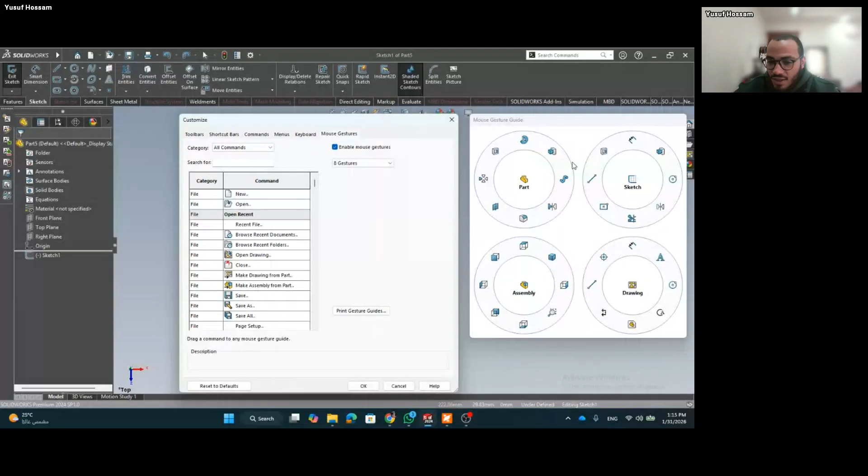You have to use the mouse gestures. You can go to options, customize mouse gestures, and put the mouse gesture that you want. These are the ones I have chosen, and it shortens a lot the time when I solve a question.

So I'll use mouse gesture to make the circle. And I can also put the dimension right now, so I don't have to wait until the circle is done and use smart dimension separately. I can put the dimension right now, 35.

To activate this, go to options, sketch, and enable on-screen numeric input, and create dimension only when value is entered. Check each of these two. So 35, 20.

15, and 50. 15 and 50. I will fix one to the origin, and the other ones I will dimension them. 30 and 60.

30, using smart dimension from the mouse gesture, and 60. The bottom one is 60, and these two centers are vertical. So this is 60, and these two are vertical. The last circle, 30 and 100.

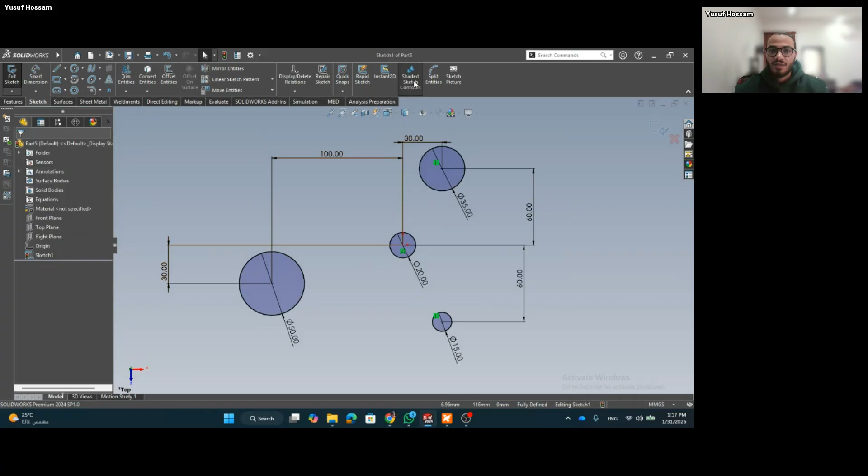Okay, so now the circles are good, the dimensions are good. Now we have to make the belt and chain.

So we can activate it from here, belt and chain. And the arrangement actually is important, so I have to choose the circles based on this arrangement, the belt, the direction of the belt. So an arrangement like this... oh sorry, there is a problem here.

Before we get into the belt and chain, we have to make each of these circles a block. This is actually an error we have, because belt and chain cannot identify regular sketch entities. We have to convert it first into a sketch block. So this alone should be a sketch block, and this alone should be a sketch block, and so on.

So we cannot see it here, but actually this circle is spinning. This is a property in sketch blocks, the shape is not fixed, so it can rotate about this point.

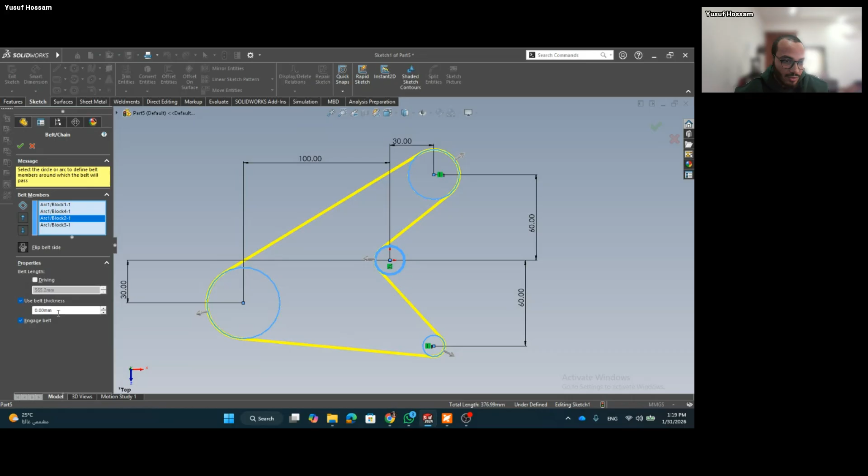Very good. And I can engage belt.

So this is the first question. The belt thickness is 15, and he wants the belt length. The belt length is actually here, and also if I edit the belt, it's actually mentioned there. So this is the answer of the first question, 640.24 millimeters. Okay, so now let's get to the second question.

Oh, there was actually some modification to this exam.

Nearly in all of the questions in all of the exams of SolidWorks, we use something called equations. So we make the first part, or the first question, and it's often an MCQ question, multiple choice question. So you can get to know if you are right or wrong based on if your answer is in the choices or not.

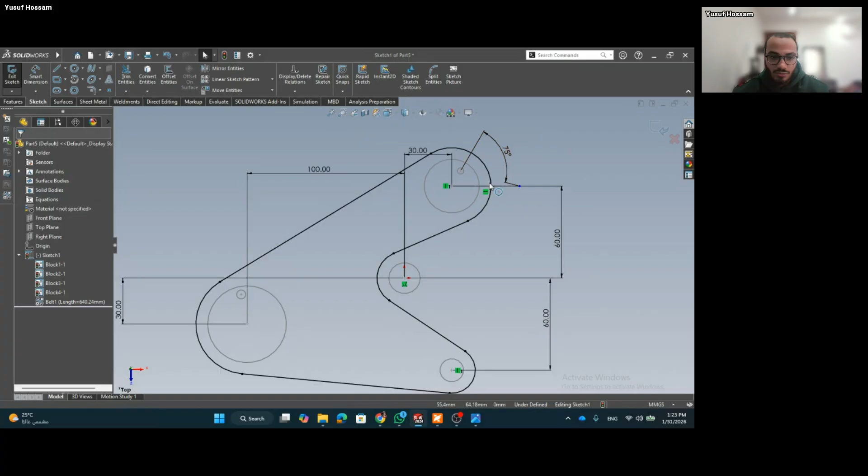Okay, so what I wanted to do is actually making this with an angle, like, it doesn't really matter, 75. I want to just explain you something, and if this is 75, this doesn't work, so I have to do it this way. 40. If this is 40, then this circle also has an angle.

And it's driven, yeah. So if I make this 60, then the angle here changes. 110, and also this angle changes. So this is actually the idea behind the question that might be the second and third questions. So the belt and chain could be 3 questions, and the second and third questions could just be edit the equation or edit this dimension, and so on.

So this is the belt/chain question. Anyone has a question?

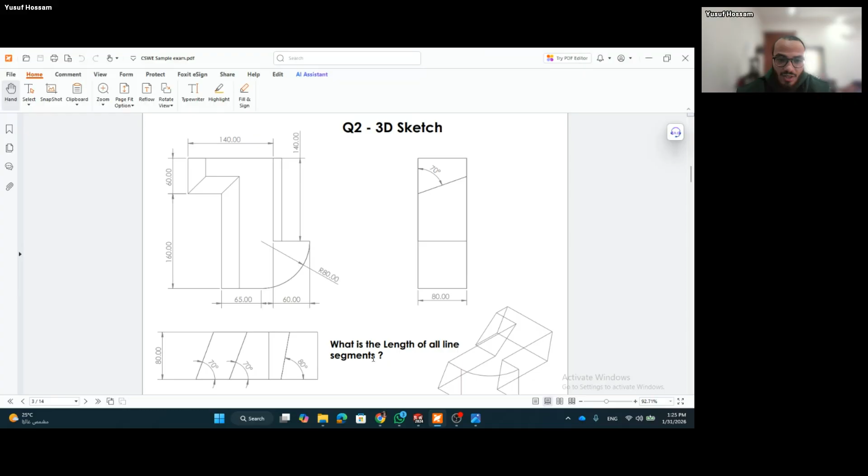So we have to make a 3D sketch, and it tells us he wants to know the length of all line segments. So 3 projections and some basic dimensions, and also angles and so on. The 3 angles there and a height and so on. And also we have the isometric.

So we have to draw this question. So how to get started in this question? Actually, there are multiple ways, and the intuitive way actually is going into a 3D sketch and just drawing all the line segments from this projection, from this isometric view. But this would be time consuming actually. And there is also a second problem.

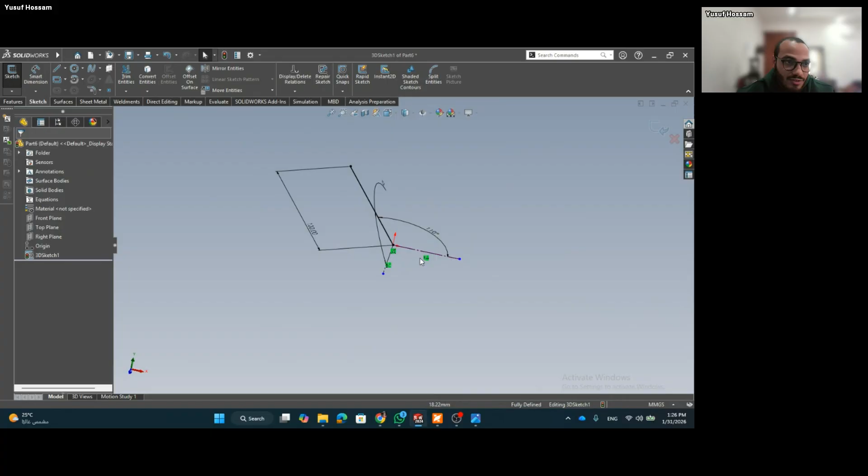If we have a line that is not constrained by a plane, so it is a line in 3D space, with how many dimensions can we fully define this line? By a length, an absolute length, and actually an angle dimension, like this. And it doesn't define, it also rotates. So we need a second dimension, like this, like 50. So each line in a 3D sketch needs 3 dimensions to be fully defined.

And look how many segments we have there. So this question will take us a lot of time. So there is actually a smart way to solve it. So let's delete this. If we see the shape, we notice that the base shape of it is kind of extruded 80 millimeters.

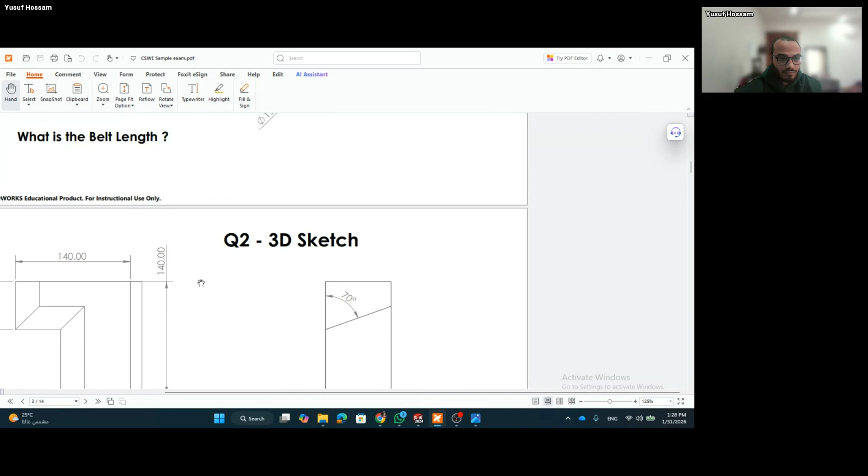And the faces of the side are taking a draft angle, like this 70, and these 70, 70, and 80. So the shape is extruded, and we have 1, 2, 3, 4 angles for a draft. We can solve it from this perspective. So let's open the top plane and draw the basic shape of the base, which is these basic dimensions. These are the dimensions of the base.

Okay. Oops. Very good. So 140, 60, 160, 75, 65. And this is vertical. And we have something like an arc. Okay. And this is 80 in radius. This is 60. And that's it. Is this 140? Yes. So we have the shape. It is fully defined now. Okay. So it is fully defined.

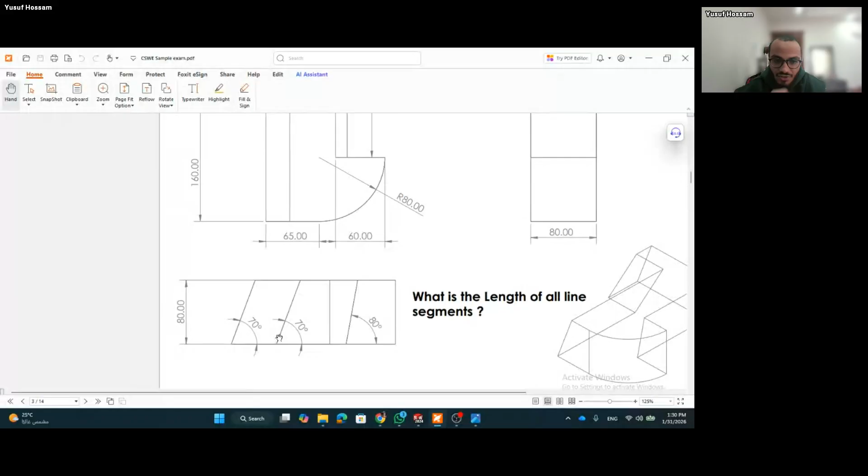And by neutral plane method, this is the neutral plane, and the faces to draft are these. And the draft angle is 70. No, it is 90 minus 70. So it is 20. So 20, and we can show preview. It is the other way. So I will flip direction in the neutral plane. So this is the shape.

Yeah. So this is the first three faces, and the second face, which is this face. It is also angled by a degree, which is in this case an 80 degree. And when we make a draft, we don't take the 80, we take what completes the 90, so 10 degrees. And it's not inward like the first ones, it is outward.

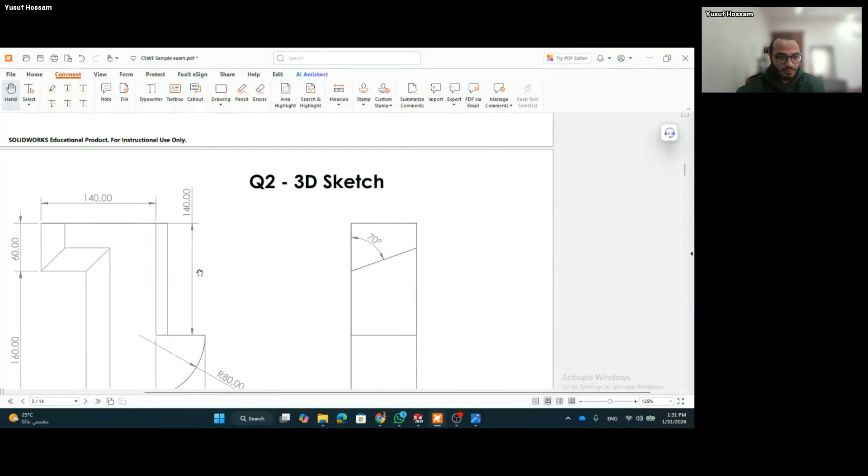So we make draft, neutral plane, this one, and this direction will make it outward, and this face, and it will be 10 degrees. We can see preview. Yes. So this is the shape. It is the same shape as this projection. Okay. So how can we get from this solid body all of these line segments? So this is the smartest way to solve this question, actually.

So let's see. We'll open a 3D sketch, and we need to select all of these edges. So I control select this line and this line all the way to all of the lines. So how can we make it faster? I can open toolbars, selection filter, or I can just click F5 on the keyboard, and we'll make a filter for only edges. So I cannot select a face or a point. I can only select edges.

And I can Control A for select all, or from here, select all. And now I have selected all the lines. I can convert them, convert entities. So now I have all the line segments. So now I will exit the sketch and go to direct editing. Now I don't need this solid body. I have already converted all of the edges. So I will use delete/keep body.

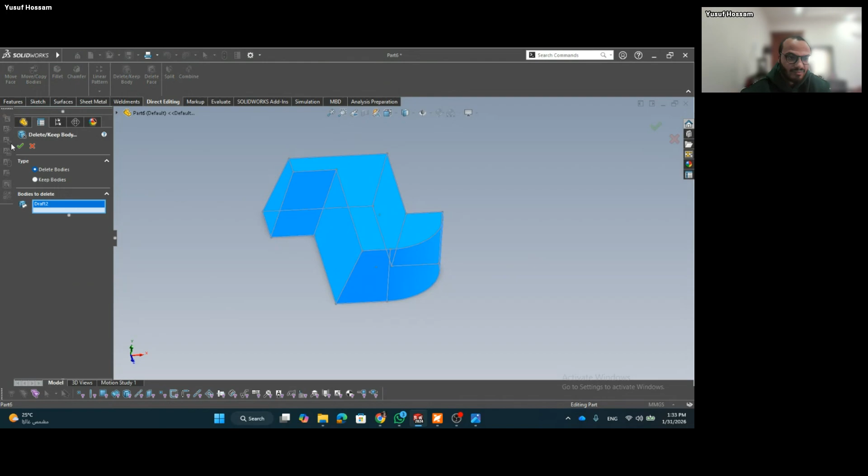I did not delete the relations of the body. I have deleted the body without deleting the relations. So this differs from if I just click delete. If I do that, all of the relations from the body will be deleted also. So I have to delete it using the direct editing command, delete/keep body, because I no longer want this body. These are all the line segments.

So I can go to it. Now I want to measure this. So I click Control A and evaluate, measure, or I have a keyboard shortcut. So the total length is this number. Anyone have a question for this? Okay.

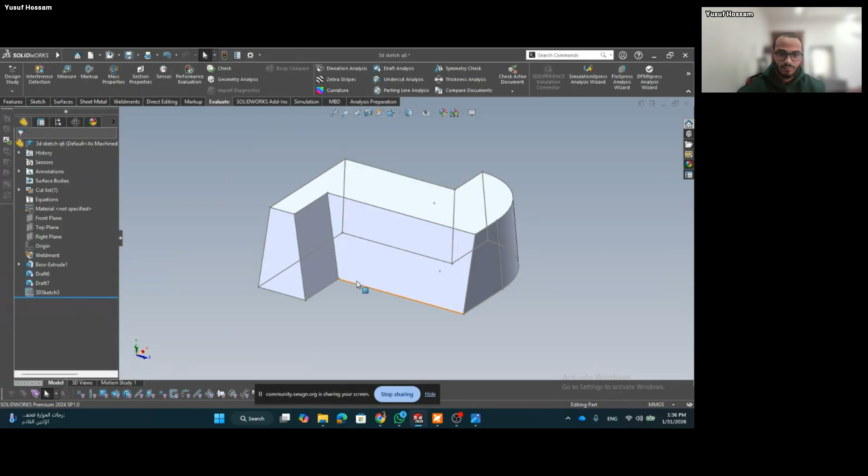Okay, let's get back. Share screen. Okay, so I'll just do it again. I will delete this body.

Okay, so this is the second question. The third question is actually a modification on the second question. And here we can start in the weldment section. As you know, the CSWE exam can have a question in either of drawing tools, weldments, sheet metal, and surfacing. So you have to be quite prepared in these topics. Okay.

So we'll start in the weldments. It wants us to use the last sketch to make a weldment, add a weldment. So the weldment profile is actually custom. It is not in the library, so we have to make a custom weldment profile. So I'll start a new part, and in the top plane, I'll sketch this profile. It is a pipe, 20 and 12. So 20 millimeters and 12. And this is our profile.

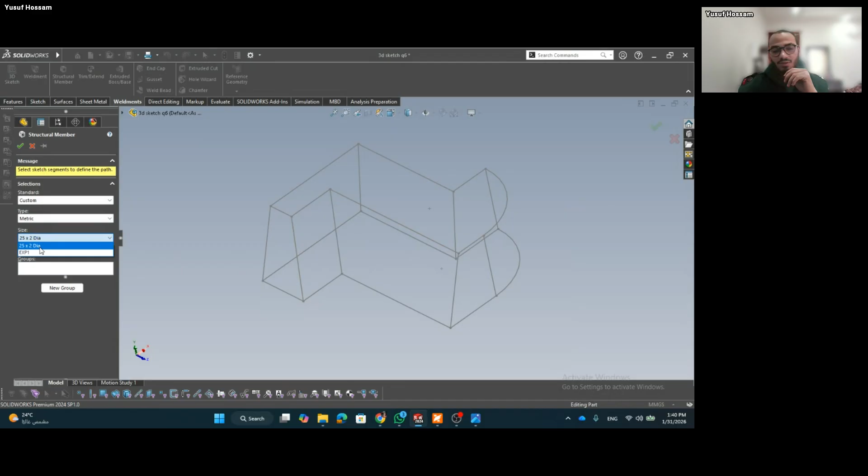and go to weldments, structural members. So custom is the name of the first folder, this. And the second folder, which is metric, the folder that was inside the custom folder, we have it there. And the size, we have the two files we have in the metric folder. So this should be the profile in the question. Now I will add the weldment structure individually.

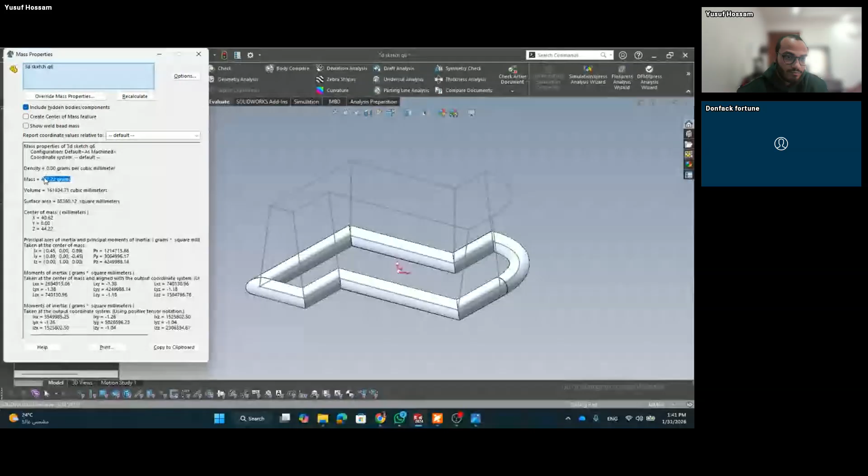So there are two conditions actually to choose segments in the same group. The lines should be continuous or should be parallel. In this case, we have the continuous lines. So now we have to add the material, alloy 1060. So material is added, all of the segments are added. Now we need to know the mass of all segments. I can click evaluate mass properties or just the keyboard shortcut. So this is the mass. Okay. So this is the third question.

Now I will add more weldments and it gets harder. So let's add it. Is it the same profile? Yes, it is the same profile. So weldments, structural member. It is easier actually to modify the structure if all of the segments are in the same feature. If they are divided into two structural member features, it will be harder to edit. So I will edit the first one and add a new group and choose these as a group. And I cannot add this because it is neither continuous nor parallel. And this is the last one. Let's see.

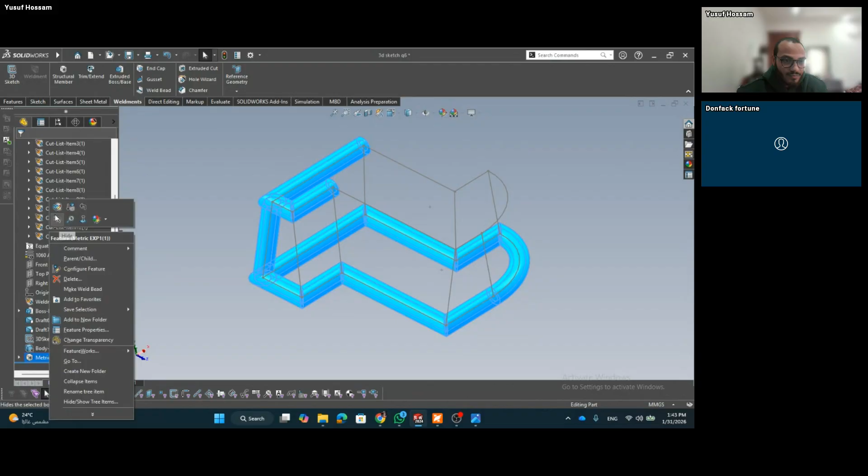So it tells me there that the trim order is 1 in all of these pipes and 2 in this pipe. So what does this mean? Let's edit this again and go to these two joints, this one and this one. So this pipe trim order is 2, and these two pipes the trim order is 1. It is the same as the question. And this, the trim order is 2, and the trim order here is 1. So the trim order actually means which pipe will be cut before the other pipe, and so on.

So it is a coincidence, but this is the answer of the question. We didn't have to make any modifications. So what is the mass of the segment indicated by 1? This segment. So I'll just click on the body and see its mass, 37 grams. So this is the answer for the fourth question.

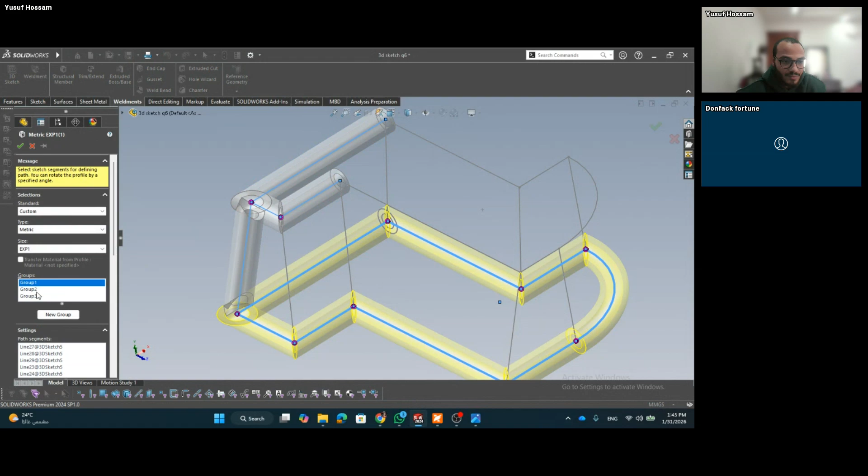Now I will need to add all of these segments except these 4 lines. Okay. So I'll just again edit the feature and go to group 2 and add all of these because they are continuous to the line segments. This is correct. And then add a new group. Add this.

And these two are parallel, so I can make it in the same group and add the last one. Very good. So this is the shape of the question. Now we have to see the corner treatment. There are 3 corner treatments. Because we make all of these segments in the same feature, we can edit it easily.

So I will just click on the corner I want to treat, this one. And also it mentions that all 3 corners are mitered equally between the segments. Mitered equally actually means that all of the segments in the joint have the same trim order. So these should have the same trim order, either 1 and 1, 2 and 2, 3 and 3, and so on. It should have the same number.

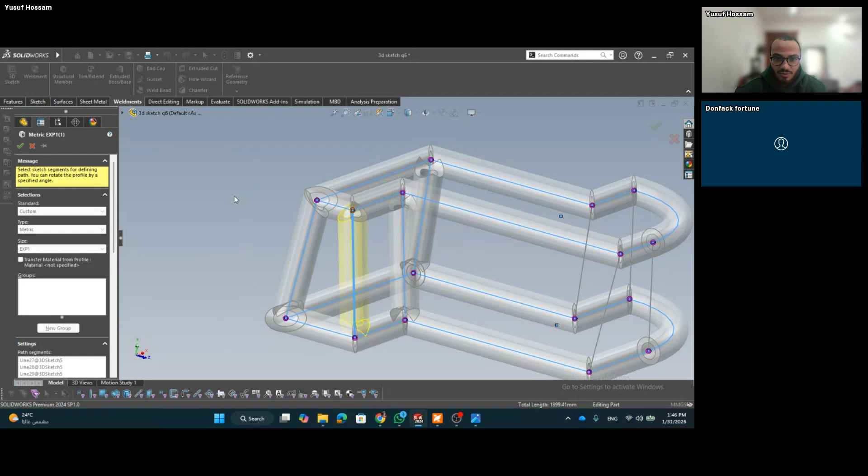And this also will make it 1 and 1. And the last is this. 1 and 1. So let's see. Is it the same? It is the same. So mitered equally. So each one of these pipes takes only a third of the corner. So this is what it means by mitered equally, or the same trim order.

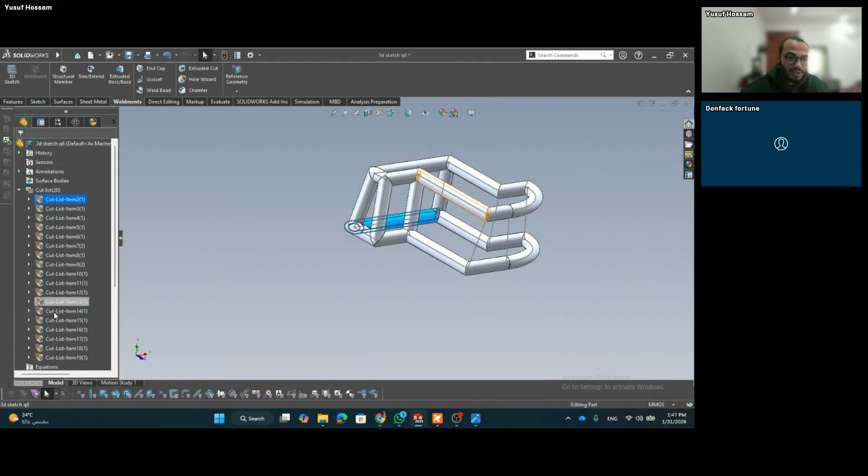So what is the overall mass of all segments? The material is the same, 1060 alloy. Now we need to know the overall mass. So it is 990. There might be a glitch, so we have to check again. Clicking on all the cut list, 990. So there is no problem. But in some cases, there is a glitch, and you have to just click on all the cut list items and recheck it.

Okay, this is the 5th question. So let's see if anyone has a question. Okay.

So we have finished the weldment section. So let's get to the spring modeling. And this is considered to be one of the hardest because it is quite tricky.

So, sorry for this. I'll just mute the mic for a second. I'll just drink something because of the cough.

Okay. Is it better? Yusuf? Are you better? Let's continue. Is it okay?

Okay. So, what are the ways to model a spring? Starting from the easiest, we can make a helix, curve, helix, and like 500, the pitch is 25, and revolutions, whatever, 10 revolutions. So we can make a spring by using a helix, and this is the most basic way.

We can add a taper angle, like 20 degrees, like this, and make a sweep on it. So these two ways are the most basic, but they cannot get us to model a spring like this. So this is considered to be an intricate design for a spring. So how can we make it?

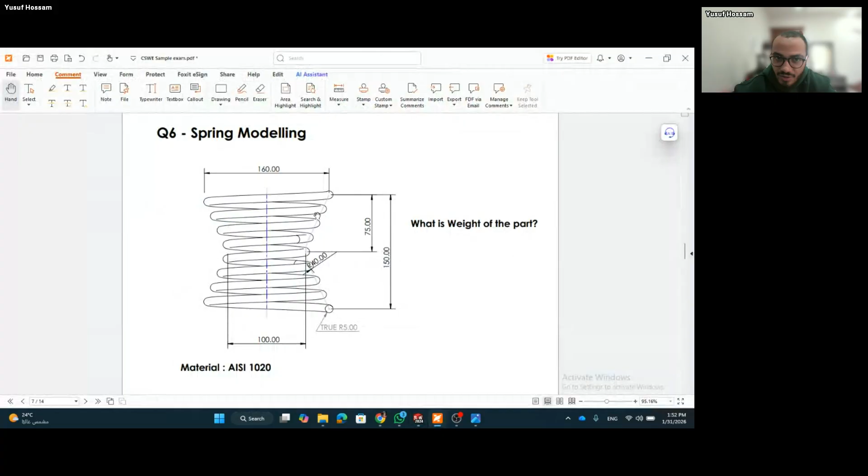This spring, or the path of this spring, actually consists of two curves. The first curve, the light gray line, center line, this line, and the second curve actually defines the pitch. So let's see what I mean. I will first draw this center line. This will be the axis.

Okay. These two are horizontal. These are horizontal. Okay. And this is in the middle. And these two are vertical. And the radius is 40. And this is 50. What else? Yeah. And this is 160. Very good. So this is fully defined.

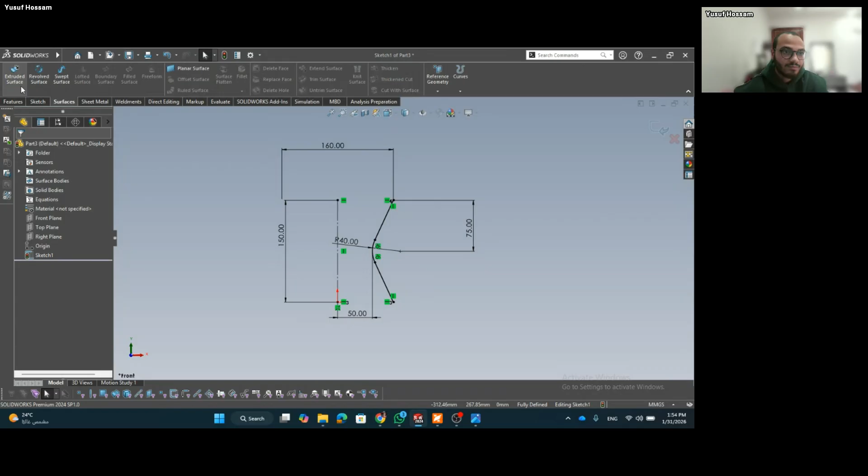Now I have the profile. I will use surface modeling. Revolve surface. And I have this surface. So this is the first surface body. The second surface body defines the pitch. So I just need any way to define the pitch. And because I will intersect the two bodies, I need to make it a surface body or a solid body, but a surface body would be better.

So I will draw on the front and just add a basic line like this. And I'll add a second sketch and a second line like this. So this is quite tricky. Well, actually, I will make a sweep from this line, only this line. Is it in the same sketch? Oh, sorry. Sweep surface, not sweep body. Sweep surface, this line, and this is the path.

It will make a basic shape like this, but I can make a profile twist. I will specify the twist value either by degrees, radians, or revolutions. In my case, I have the total length and the number of revolutions. Let's count how many revolutions. So this is 1, 2, 3, 4, 5, 6, 7, 8. So 8 revolutions. So in this way, I define the pitch.

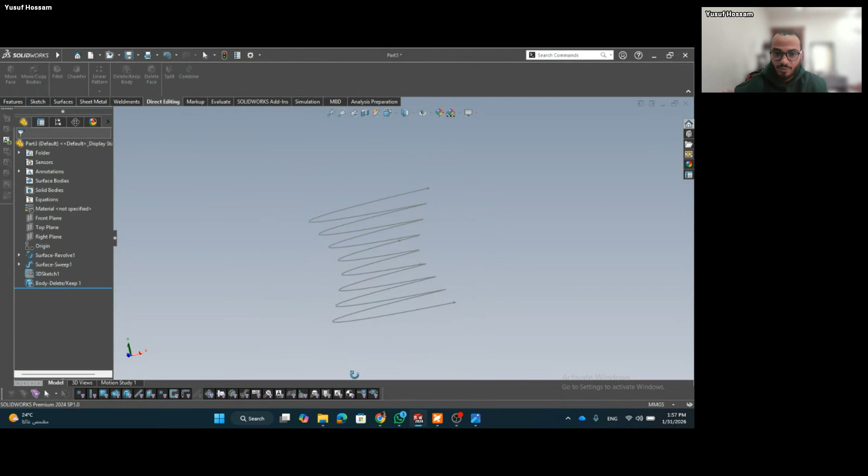So I have something that defines the pitch and something that defines the shape of the spring. Now I have to intersect it. I will open a 3D sketch, and I will go to intersection curve. Intersect these surfaces with this surface. And now I don't need these surface bodies, so I will delete them from direct editing. Now I have the path for the sweep boss.

I will sweep it, and it is a circular profile with a diameter of 10, and this is the path. Very good. So this is the spring. He wants the weight of the part. What is the material? The material is AISI 1020. So the answer of this question is 1978.

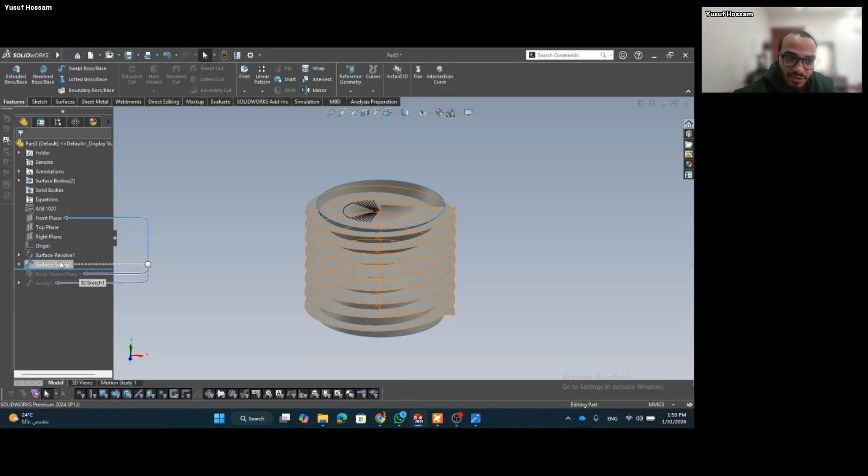Okay, anyone has a question? Yeah, I think Rahman is a little bit stuck. Yeah, intersection tool, you're correct. Can you recap the surface sweep? Why did you do that? Okay. I need a way to define the pitch of the spring using a surface body or a solid body. So there is a feature inside of the surface sweep or sweep boss. It is in the options, and it is called twist control.

And this is actually quite interesting. I will show you the capabilities of this twist control. This is, by coincidence, the fourth way to make an intricate design for a spring. If I have a path like this, let's make it vertical. And I have a circle like this, 10. So something like this, I can make a spring from it using the profile twist command.

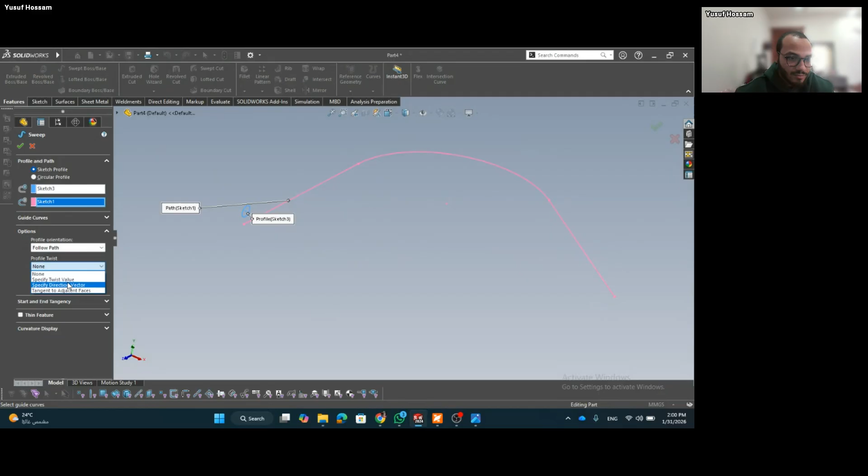So the sketch profile is this circle, the path is this. It's loading. Yeah. So there is no result because neither of them intersect. But if I go to options, profile twist, specify twist value, and make revolutions like 1 revolution, 15 revolutions. Look. So this is actually a powerful tool.

The profile twist feature in the sweep surface or sweep boss feature. By this feature, I can do intricate designs, and I can also make something like the pitch indicated by this surface. So if it's not clear, I'll do it again. This is the profile, and this is the path, and because this profile is swept along this line, I can control how it is swept, and this control is the twist value. Okay. And so on. Okay, you got it.

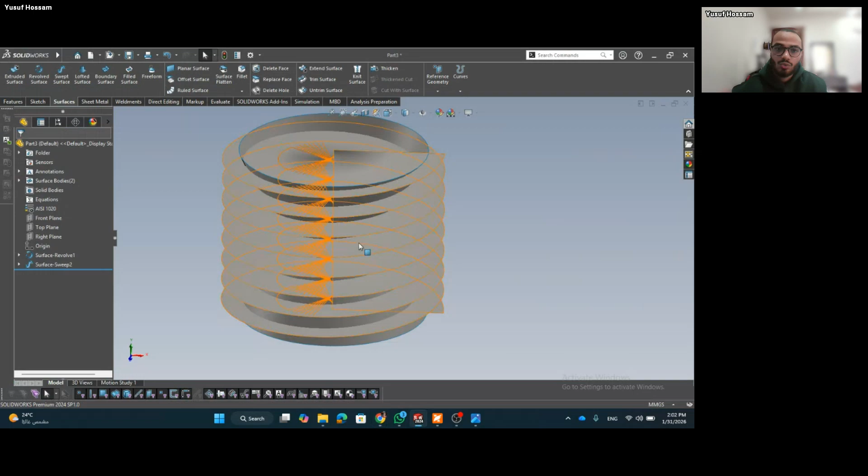Yeah, this is smart, but it is not in this question. Muhammad asks whether we can make double tapered springs for this question. It could be if we don't have this small radius, because adding this small radius to an intricate design like two tapered springs will be hard. But this is smart. Okay.

So these four ways are the only ways to make a spring. The first is the basic helix. The second is the tapered helix. And the third one is the intersection of curves. The intersection of curves could make nearly all kinds of springs. And the fourth way is the twist value for a sweep. Okay. This is a bonus question. So let's see the next question. Sheet metal.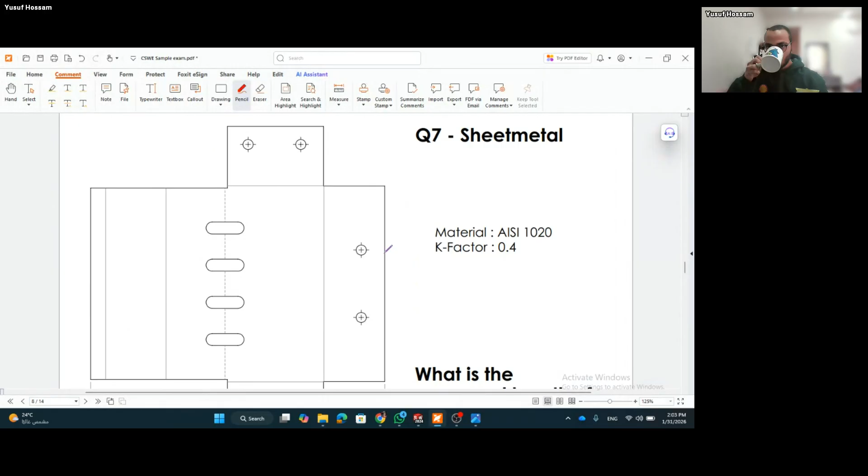So for this question, actually, we will not make a sheet metal. The part is provided by the exam. So I'll just open it. It's called this. No, it is AP1 step file. So it is a step file. It doesn't have any property of sheet metal, so I cannot flatten it.

Oh, I don't even have a tree manager. So how can we deal with this? And this is a strong topic actually in CSWE: how do you behave with the imported parts? So the material is AISI 1020. So this is the material. K factor is 0.4, and he wants to know the X dimension after flattening it.

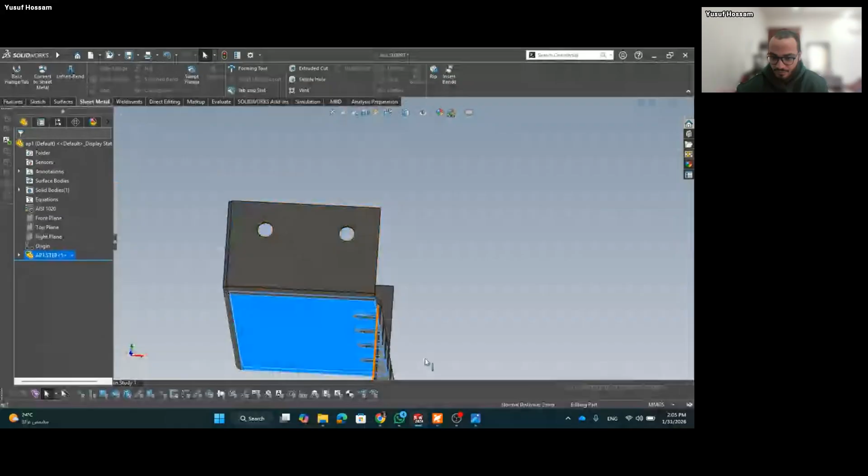So the problem here is how to convert this part to a sheet metal part. So here we have a strong tool called convert to sheet metal. Convert to sheet metal makes a solid body or an imported body a sheet metal part by identifying the bends. So we have to check for the thickness. It is 2 millimeters. So the thickness is 2, and the bend radius is 2.2.

And the base of the part or the fixed entity is this one. And I can just tell SolidWorks to collect all the bends. So it identifies 1, 2, 3, and this one, and this one, and this one. So we've checked that it identifies all of the bends. So if I flatten now, it's converted to sheet metal. And from here, I can modify the K factor. So instead of 0.5, it's 0.4.

And if we didn't modify the K factor, the flatten length will be wrong. So flatten. And let's check if this has the same shape and the same bend lines, 1, 2, 3, 4. So it is the same. So now it wants the X dimension, so it is the length of this line. So the answer is 286 millimeters. So this is the first question for the sheet metal.

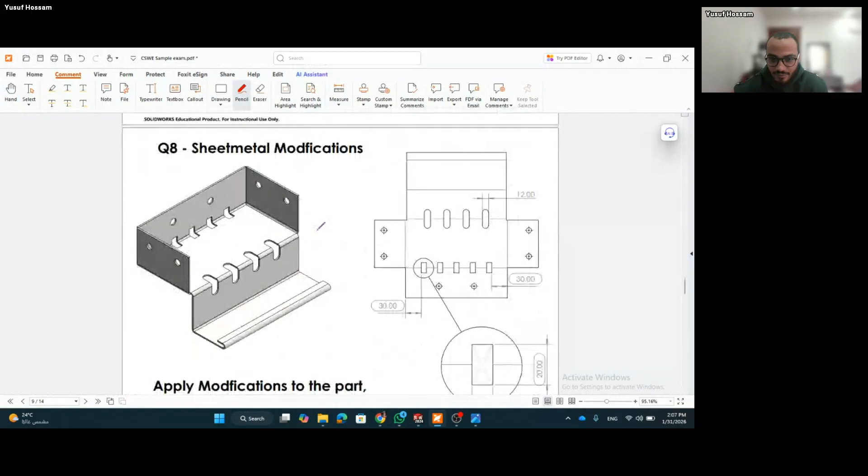So the second question is modification on the imported part or the sheet metal. We have converted it now. Apply modifications to the part, then determine what is the part center of mass. So what is the modification? We see that these cutouts are inserted, so we have to make it. But the problem here is that these cutouts are on a bend line, so we cannot make it easily.

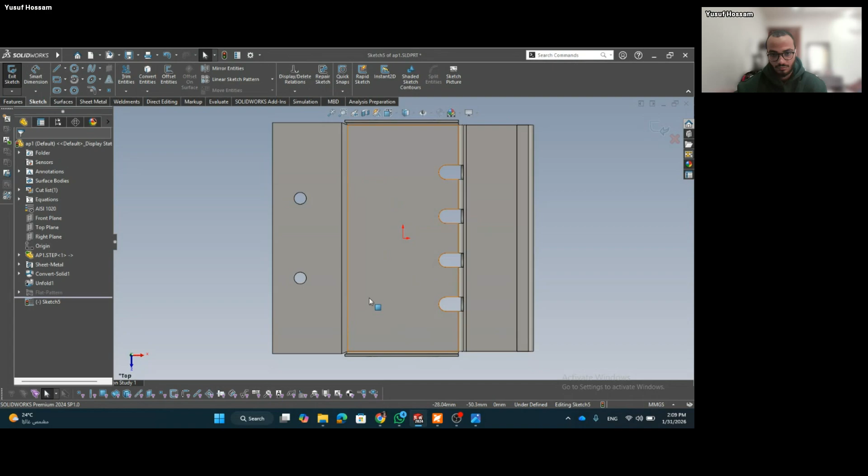So the trick here is just go to sheet metal and unfold it. Unfold this only bend. And now I have a flat face. Now I can make a sketch on it. And after I make the cutouts, I will fold it again. So a rectangular cut, 20 by 10. Rectangular, 10 by 20. And it seems to be on the center line, like the center of the rectangle on the center line.

Okay, I believe the center line is in the middle of the bend. So these two should be vertical. So this is 30, this dimension. And it is completed. Now we have to do the linear pattern. 4 rectangles, and the dimension is 30 from the other edge. So I'll make a linear pattern for these in the direction of this edge.

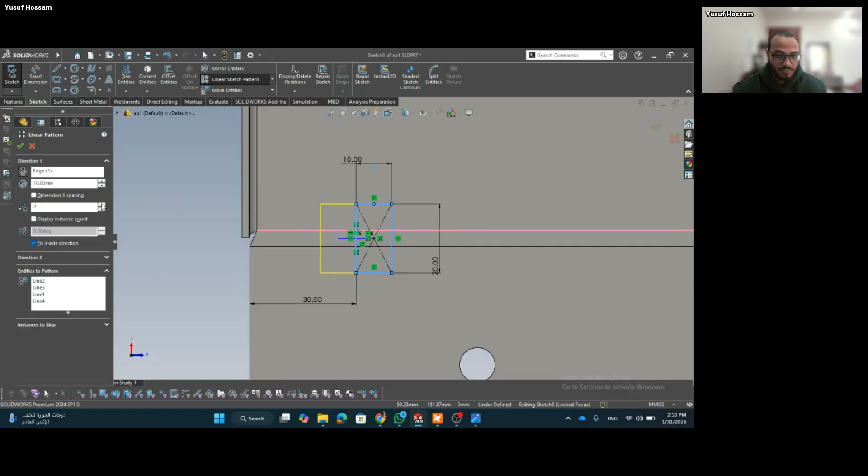Reverse. And I will do 4 copies, and I will just do any number. I will not check the dimension x spacing because it will fix the x spacing. I'll just need to drag them like this and add the 30 afterwards. Very good. So this is the 30, 20 by 10. So now I can make the cutouts. And I can just fold again.

Very good. So this is the 8th question. What does he want? The center of mass, and the material is the same. The center of mass will be these 3 numbers. And this is the answer of this question. Okay.

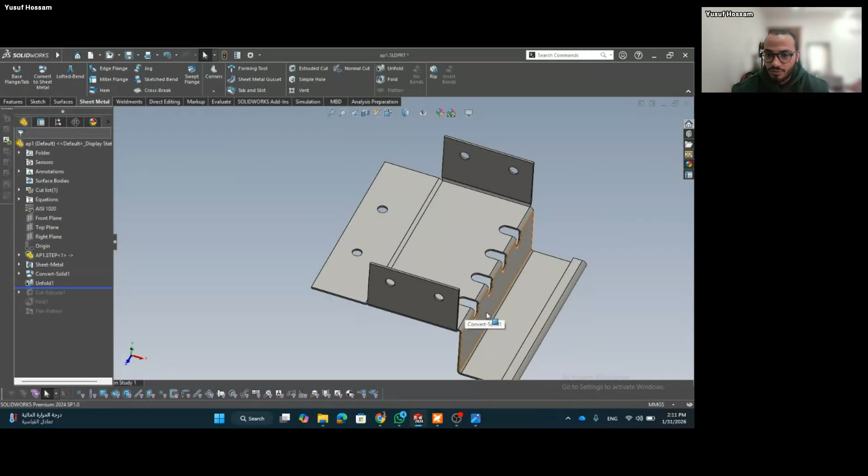If we unfold all of the bends and then fold all the bends again, it will have the same answer. So it will be correct. But in this case, this only bend is what concerns us. But we absolutely can do it for all the bends. Okay.

So the 9th question is also a modification on the part. So what happened? There is a circle, and a circle in the tester software indicates that there is a change in this thing. So we see that the number of slots is decreased by 2, and also the width of the slot is also decreased. So let's see how can we do that.

The problem is that we don't have a tree manager. So I cannot go to the feature, the cut extrude of this feature, and just go to the sketch and edit the dimension. So this question is actually a modification on an imported part. This is identified by this.

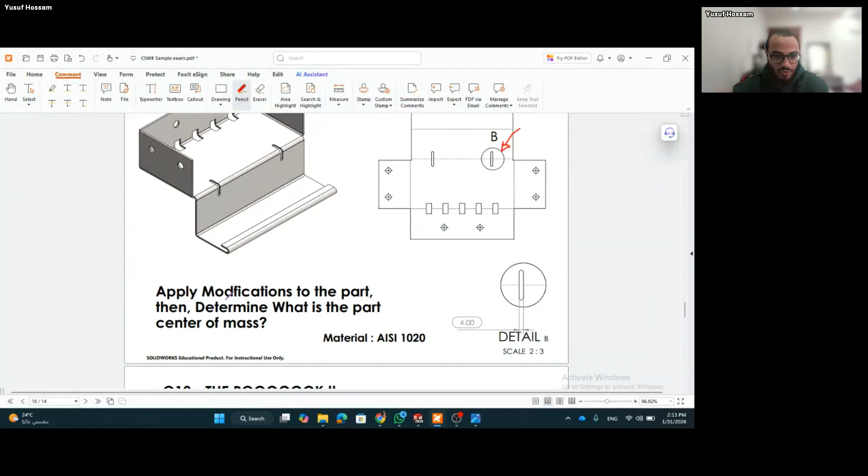Apply modifications to the part, then determine the part's center of mass again. So how can we do that? The fastest way: the new width is 4. What is the length? 12 millimeters, so from 12 to 4.

Now I will decrease all of the width. Well, I'll delete it first. I'll delete the middle ones first, these two. I can delete it easily using the delete face command. I ensure that I have selected delete and patch.

Right click and select tangency, and also right click again and select tangency. Show preview - it should be correct. Okay, so I deleted and patched the cutouts, so now there are no cutouts in this area. This is half of the answer.

Now I need to decrease the width. I think in the previous question there was a point with one rectangle, and Ahmed Abdel was... I can't hear you, are you with me? I think Ahmed was right with that - there was one rectangle that was missing. It was 5 of them actually, and you just placed 4 of them.

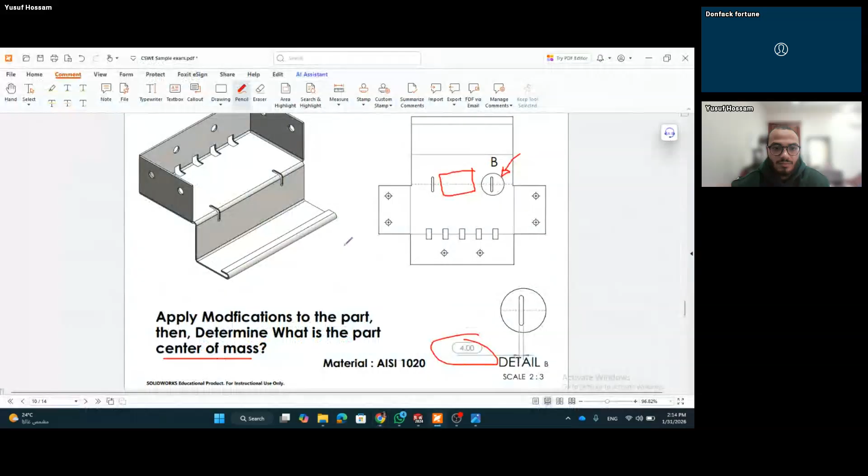Yeah, you are correct, that was very good, Ahmed. No, very good, Ahmed, yeah. No one noticed. This could be easily modified by just double clicking on this number.

I'm just dragging again and adding the 30 degrees, the 30 millimeters. Thanks, Ahmed, for this insight. So the answer for that question is these numbers.

Okay, let's get back. There's also a small question by Tamir Rahman. He's asking about the difference between the delete and patch command and the delete and fill command. Yeah, actually, delete and patch...

Well, actually, the behind the scenes between these two specific commands is quite intricate. For delete and patch, I don't know what happens behind the scenes because I haven't actually used it that way. Delete and fill, I haven't used. Delete and patch does work for all kinds of stuff, but delete and fill, I haven't actually used it, and I don't know who uses it or what it does, because delete and patch works all of the time.

But Yusuf, let me try. I think the delete and patch command is more of a command that actually closes the surface. Let's take an example of a hole where you want to close the inner surface of the hole. What you're going to use basically is the delete... in fact it depends on context, but most of the time you're going to use the delete and fill command. But when it comes to closing surfaces, sometimes delete and patch is better suited.

So, like Yusuf just said, I don't really know what's going on behind the scenes during the coding, what they were thinking about, but depending on the case, delete and patch can be used, and delete and fill can be used. That's my own knowledge of that - but in my case, delete and patch did work for all kinds of things, either solid modeling or surface modeling. Delete and fill doesn't work all of the time, and the behind the scenes is quite intricate.

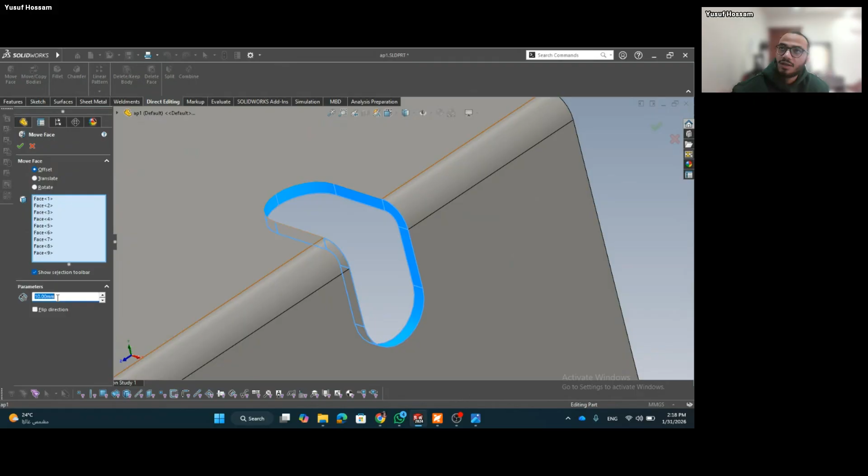Okay, let's continue. Now to decrease the width of these two slots from 12 to 4. The easiest way is move face and make an offset. Right click, select these faces, and offset by 4 - so half the distance.

This one is okay, right click, select tangency, and so on. So let's check if this is actually 4. Yes, it is 4. So this should be the 9th question, the same material.

And now it wants the center of mass, okay. And this is the answer of this question.

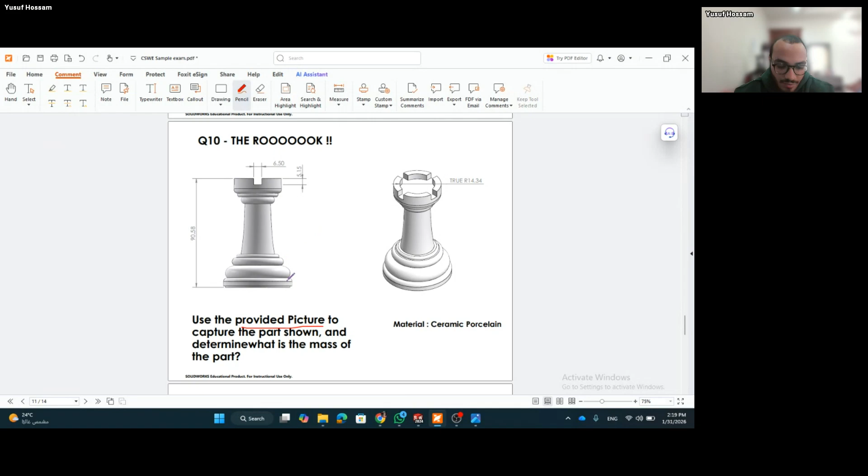So the 10th question is actually about a sketch picture. There is also a photo you inserted in SolidWorks. Let's see what it wants: use the provided picture to capture the part shown and determine the mass of the part. So we don't have any information about these curves, the radius, the total width, and so on - all of this information is captured from the image. Only a little information is in the question, so we have to insert the picture first.

Let's copy it and put it on the desktop.

Go on front plane and sketch picture. We can search it, sketch picture, and see where it is by clicking on this eye. It should be in tools, sketch tools, and so on. It's hidden somewhere there. Sketch picture.

And go to the rook, and now we have the information. Now we have the picture. The only problem is the scale.

The aspect ratio of this picture is locked. We cannot unlock it, or the answer to this question will be wrong. So we have to make the scale with a locked aspect ratio. We can use this number as an indication for the scale.

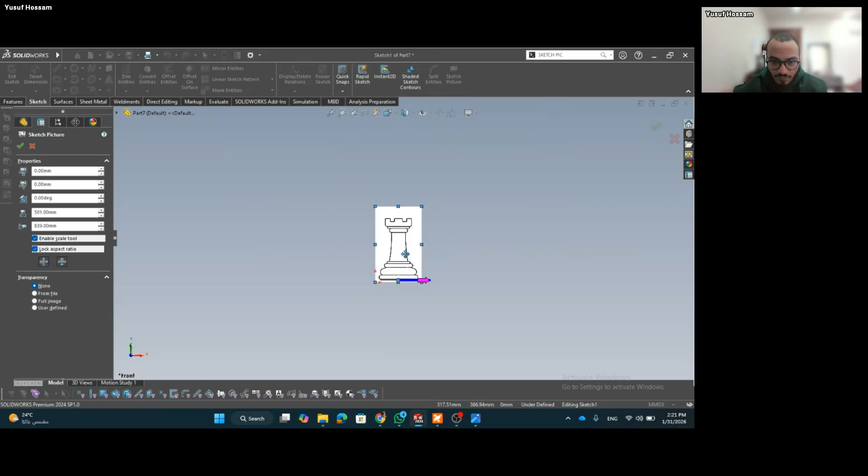It is the total height from the base of the rook to the topmost circle, 90.58. So we use the scale tool. We will make sure it is on the bottom, and the end of the line is in the top. Okay, so this is 90.58. And I click yes.

Okay, so now we have the shape of the rook. Now the only job to make is we trace the edges.

So we have to identify the center of this and fix this point, and also fix this. And this will be the axis that will be revolved around.

Now I'll go to sketch, spline, and I will trace the edges. If I can make anything with a line or a curve, then I will use it.

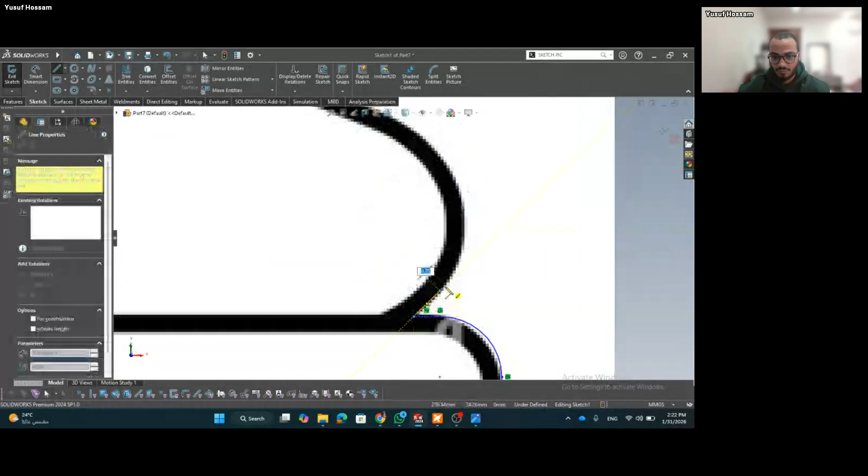Okay, and now I need to trace all the way from the bottom to the top of the rook. But this way actually consumes a lot of time, so there is another way.

Let's see. If we go to add-ins and check for auto trace, if we get back to the sketch and double click on the sketch, on the sketch picture, and click on the next icon, now we have the auto trace.

There is a problem here. I believe this is a glitch. It is a glitch. Yeah, it is a glitch. If I do it again... let's see again.

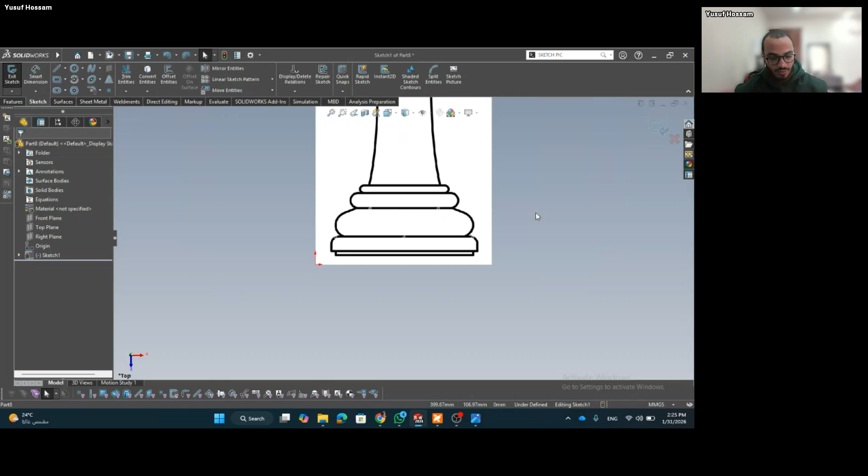There's quite an issue here because the auto trace command does work well, but for this condition there is a glitch. We click next now. In this window, the image of the rook should appear, but there's some kind of error. It is so scaled up, zoomed in on a certain line, so there is an issue.

And I cannot zoom out or zoom in. Whatever, so I needed to explain this to you because this consumes nearly a fifth of the time if we trace it manually. But this is a glitch. It is a glitch.

Okay, so we'll trace it manually.

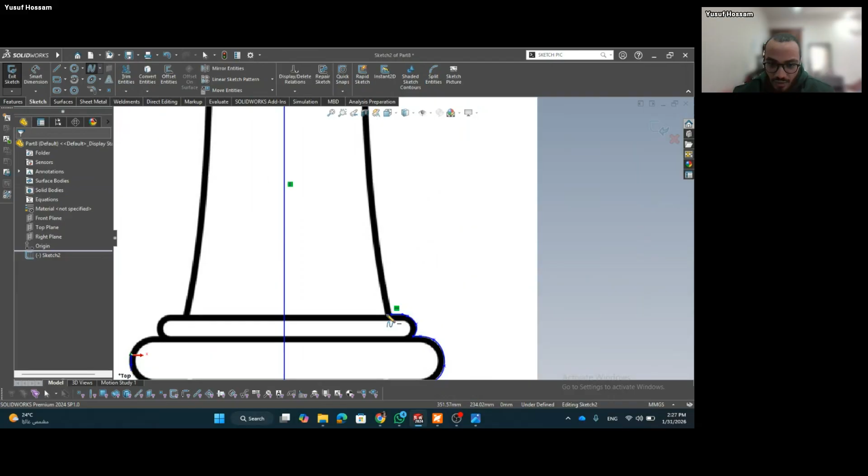In this question specifically, the error margin for the answer will be large. Like in common cases, it is plus or minus 1%, but if this question is in the exam, it might be like 3% or so, because the error happens when we try to draw.

Okay, now we have the profile. We can revolve it. Is it closed? It is closed. Now we have the shape of the rook.

Now we need to make the cutouts. First we'll make this cutout, 14.34, and it's written true, because any dimension in the isometric view could be true or not the true value.

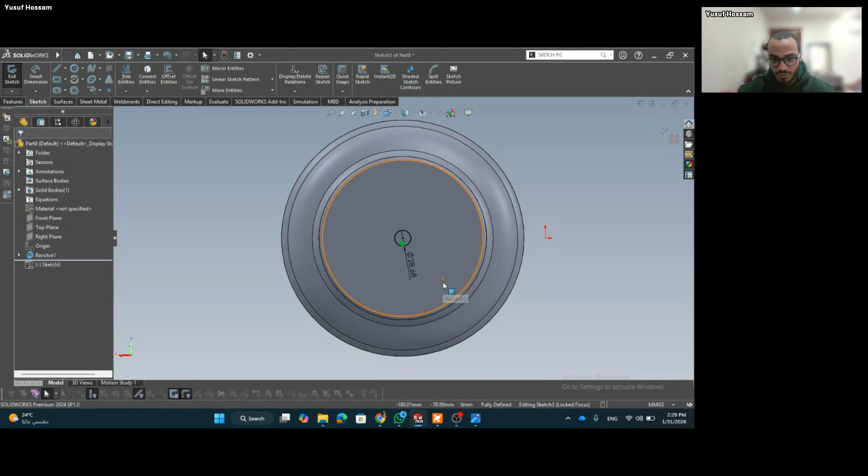It could be the dimension in the isometric shape on the drawing. So if it is true, then we can draw the circle with this dimension, 14.34, 14.34 multiplied by 2, 14.34.

There is a problem. Something is wrong. Is the scale not correct? We did not scale up. We did not make it.

So it is again 91.58. Okay.

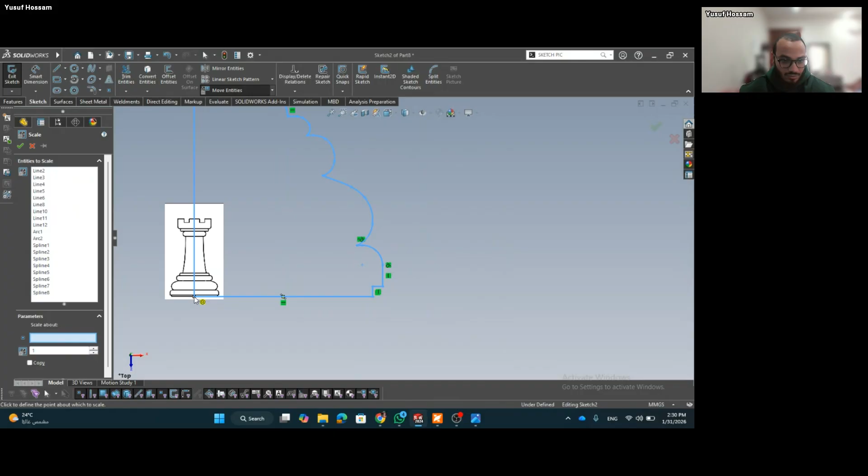So we can scale entities, but the ratio is not known, and also the segments is... but this is a problem. We need to redo it again.

Or just if we know the scale ratio, we can make it scaled again. But in the part, we can make it scale and just scale it. But this already took a lot of time from us. So I'll just tell you the process, because if the auto trace function did work, we could have solved it in nearly a minute.

I'll just make a cutout by a depth of 5.5. No, doesn't matter.

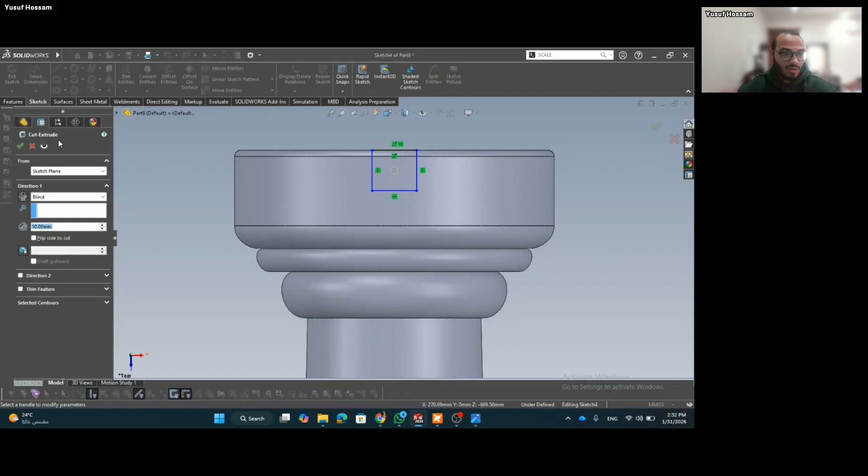Now we'll make the rectangles by any dimension, because this dimension we cannot work with now. So nearby dimension through both directions. Well, it should be.

And we can make a cut extrude. We can make a circle pattern in this direction for this cutout.

Okay, so this is how you can solve it, but we have the issue that the auto trace did not work. The function of auto trace automatically traces the edges if we have a contrast. So if we have a shape like

the Batman logo, something like this, it has a lot of contrast, black and white, so it can easily trace the outer edge of the logo.

So because the picture of the rook has the same criteria, it does have contrast, white and black regions, the auto trace command should easily trace it. But unfortunately, it didn't work. So the only way to do it is manually, and it will close.

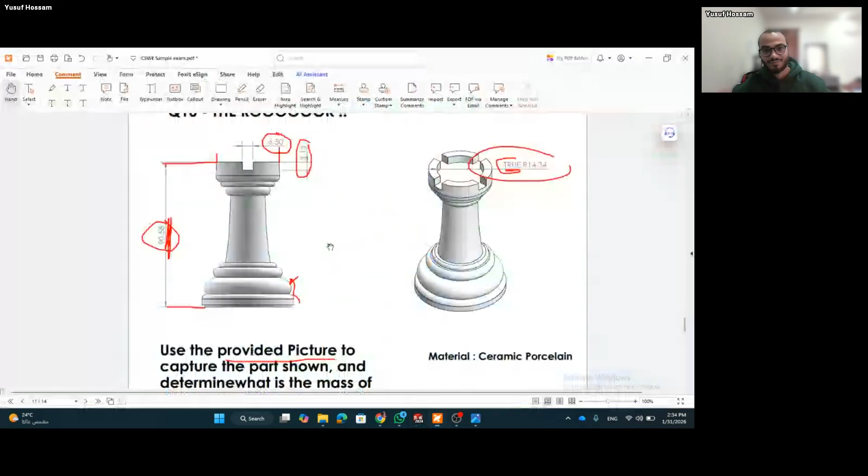A lot of problems in this meeting. A lot of problems.

Okay, anyone has a question? This question messed up a little bit, but if anyone has a question, I'll answer. Oh yeah, it's not scaled. We figured it out really late.

Assembly modification. Again, the assembly or the part for this question will be provided from the exam. So it is AP2. AP2, yeah.

So let's see what it wants from us. We have an assembly, let's open it. And these are 3 different parts. Okay, so let's see.

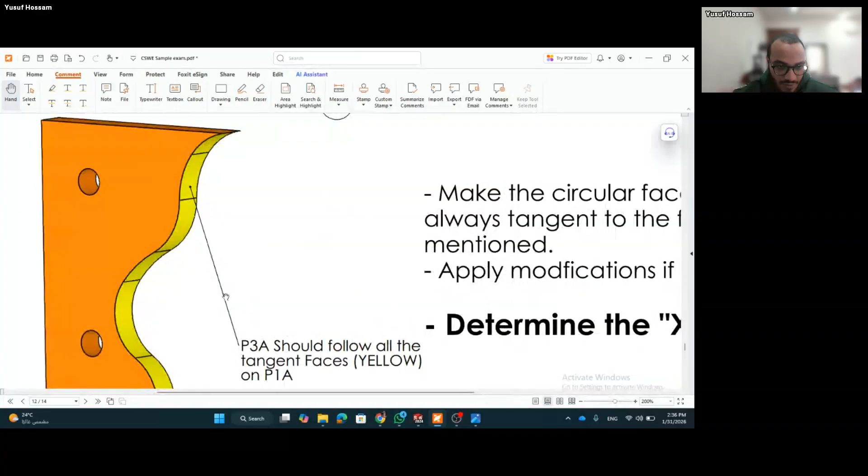Make the circular face of P3A, which is this part, always tangent to the faces mentioned. The faces mentioned are these yellow faces. We need the circular face of P3A to be tangent to it all of the time. Apply modifications if necessary, and after that, make a parallel relation between these 2 faces, apply a distance mate, and we need to measure the x distance from this face to this face.

So let's see, are there mates for this assembly? There are no mates, so we might need to do it again. So these 2 faces are coincident, these 2 are coincident, and these 2 are coincident.

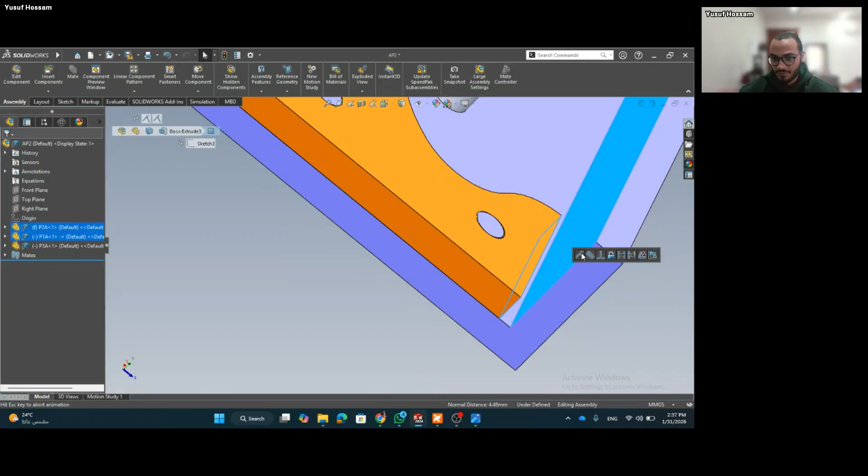If you notice, the hole and the pin move according to this part. This means that this part is made in the assembly, or it has an in-context feature - yes, it is this cut extrude. It has an in-context feature, so in this part it does lay on this face. So we'll make it coincident.

And these 2 faces are parallel, this face and this face, so I can move it anywhere I want. So the problem here is that we can make a tangent mate for only a face, like tangent for this face and this face, or this one and this one. But I cannot make a tangent for this face and all of these faces all together.

So if we make a tangent for this, it will follow only this curve, and will be tangent to the extension of this curve. So this will not work for us. We need another way. There are 2 ways actually to make it.

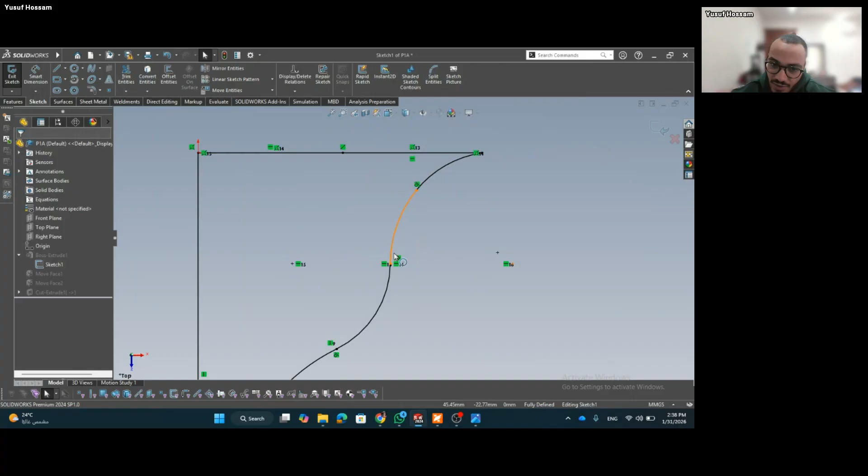I will open this part and go into the sketch of this boss extrude. So these line segments are what make a difference in the surfaces. Each line segment makes an independent surface. So if we make all of these segments a single segment, that will result in a single surface. So how can we do that?

This is made by a command called fit spline. Fit spline fits all the segments that you select into a single spline, and a spline is a single segment, so it will result in a single surface. So I'll select all of these. This is not a closed spline, it is open, so I will uncheck this and click OK. So if I click on this, it is a single segment now.

So this surface is now a single surface. So I can make a tangent relation now to it. So this will move according to the tangency to this surface. So this works, this is a great solution.

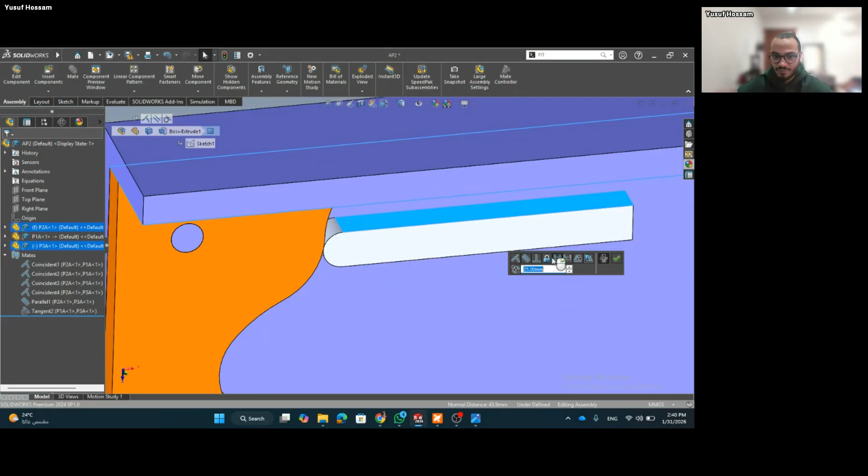What does it want? Make the distance from this face to this face 25. There's also a note: the drawing does not represent the real position of P3A, so this is normal. So this is 25 now. It wants the x distance from there to there. So this is the answer of this question, this is one answer.

The second way to do it, without the fit spline, is by surface. We can use direct editing, delete face, select tangency, and we can delete all of these faces. Now we have a surface body. Now we can enclose it again by a surface, boundary surface.

We can select a group. And this is the first. And we can select a group again. This is the second. Now we have a surface. We have the same surface. Now we need to knit these surfaces and enclose it. Create solid, merge entities. Now we have the same body. We have the same surface, but with another way.

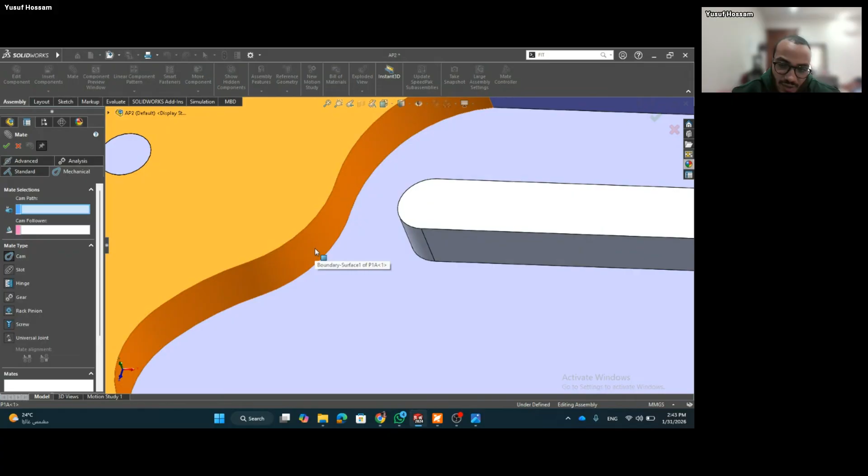Okay. There is also an important note that there might be one of you that will think of the cam mate, but it will not work because the cam path needs to be closed. If it was closed, then it will work. But if it is an open path, then we cannot use it. The follower, and we cannot select the cam path and open path. Okay. So this is the 11th question. Any problems? Okay.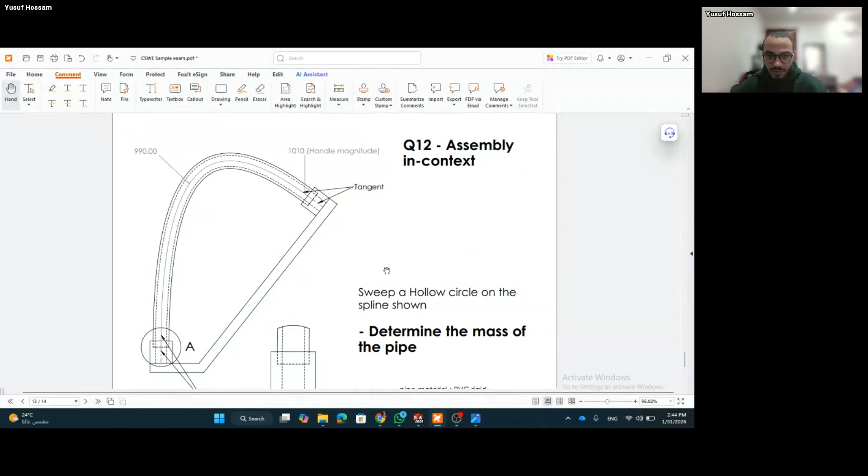2 questions left. So question 12 is an assembly in context. We'll make a part inside the assembly. It is also provided by the exam. Okay, so this part is provided. Now we need to sweep a hollow circle on the spline shown. So this part is what we have, and this part we need to create it. And we need to determine the mass of the pipe. Okay.

So you cannot make the flexible tubing part easily without making it inside the assembly, because it will be hard if you go to a single part file and try to make the appropriate tubing for the distance in the assembly. For the distance, the vertical distance or the horizontal distance and so on, the angles are also required to make it correct. So the best way is to make it inside of the assembly, and this is called top-down assembly.

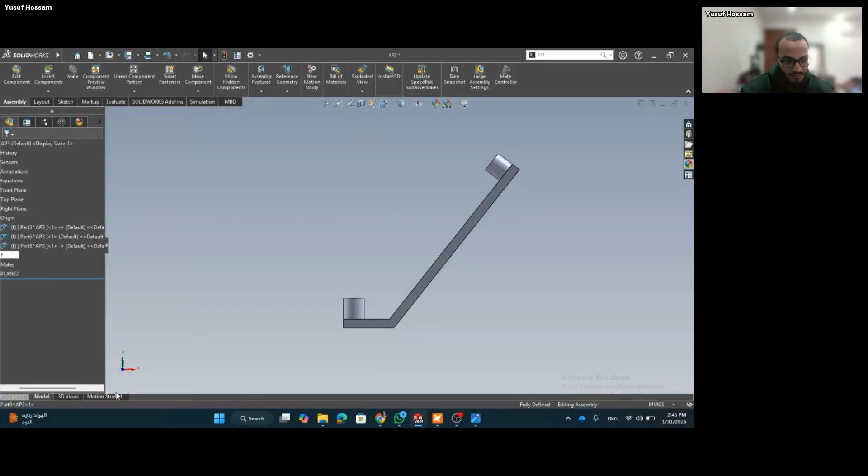So these 3 parts. Now, how can I make a new part? I can click here, new part, and it is generated. I can rename it tube. Okay. So now, if I want to edit this part, I have to right click and edit this part. This plane by coincidence is in the middle. So it is the right plane for us. I will sketch on it.

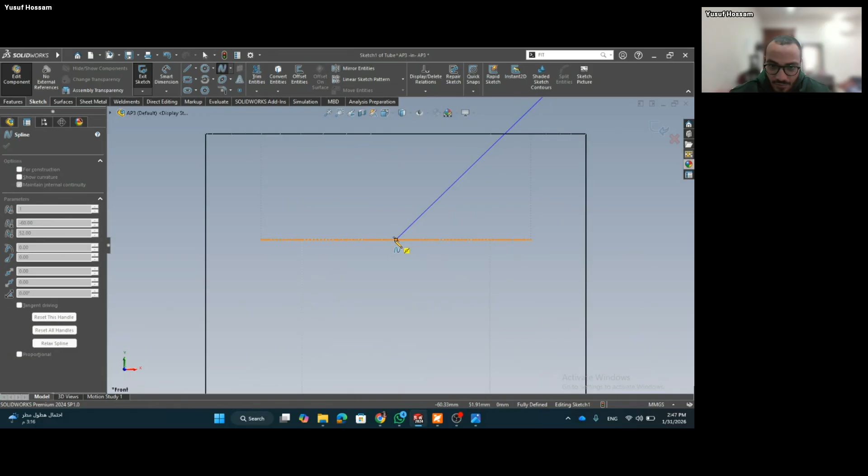So I'll make a spline. The spline starts from this line. Okay. So the tube sits on this face. The face of the tube is coincident with this face. So this is the start. So I'll just snap to the midpoint, here it is, and the midpoint of this. So this is the spline.

We have to show the handles. The control. Yeah. The handles of the spline should appear now. Inflection point. Even the control polygon doesn't. Well, this is a problem. Oh, here it is. So it wasn't activated in the settings. I don't need the control polygon, the curvature comb. So these are the handles.

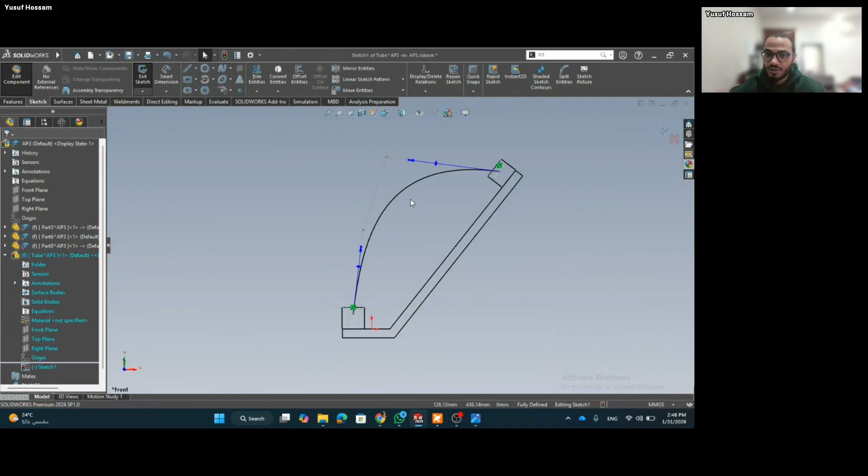I need to make the flexible tube with only these 2 handles. And it has 2 points. Now this tells me that the spline or the tube is tangent to the center line of the cylinder. So if we make a line like this, and these 2 are perpendicular, the spline and this line are tangent. The same condition is also here. This spline and this center line are tangent. So the spline is still underdefined.

Now the magnitude of the handle is 10 now, 1010. I can click on this magnitude and enter the value. Now it's still underdefined. The last dimension is the total length of the spline, which is indicated here by this 990. So now the spline should be fully defined. Yes, it's written there, fully defined. And the handle is blue, but never mind, this is a glitch. So this is the path.

Now I have to make a sweep by a profile. Where is the correct profile? We can get it from the dimensions, the outer circle and the inner circle. 35 millimeters and 50 millimeters. It is the same dimension as this fitting. So 50 and 35. So we will get back again to the part we've made. If we make any modifications to the part, we have to go to edit part first and then make the modifications.

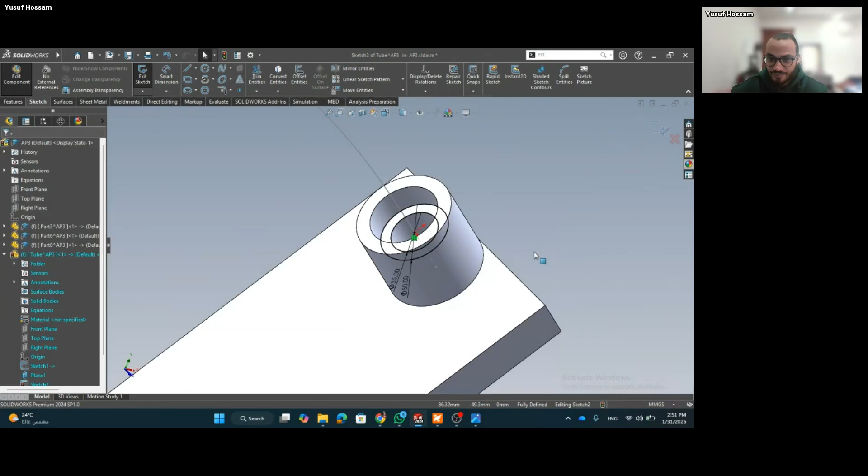So I need to make a plane perpendicular to it, to make the profile I want, and I will sketch on this 50 and 35. And in the first place, I could have converted these two edges. Okay, now I have the profile, and I have the path. All that is left is sweeping it. So the profile is these two, and this is the path. Very good. So this is the flexible tube. What is the material? PVC rigid. I click material.

PVC. So this is the question. Okay. We need the mass of the pipe. So the mass of the pipe is 1,288. Okay, anyone has a question?

Oh, yeah. I think there's the question from Islam. Islam? Where? Oh, Muhammad. But Muhammad, you cannot mention actually the same question in the exam, but if you have the same exam as I did, the question you mentioned actually has an error. If I am not wrong, it has an error, because I don't know what was wrong until now. I don't know, because in the exam, this question itself has a big problem. I don't know what happened. Okay.

Still the last question. The last question. This is easy actually. Sketch text. So the trick here is that in the front view we have a letter C, and in the side view we have letter E. So how can we make it? Let's see. So we'll just sketch the letter C in a plane. Letters are written using sketch text with 72 points.

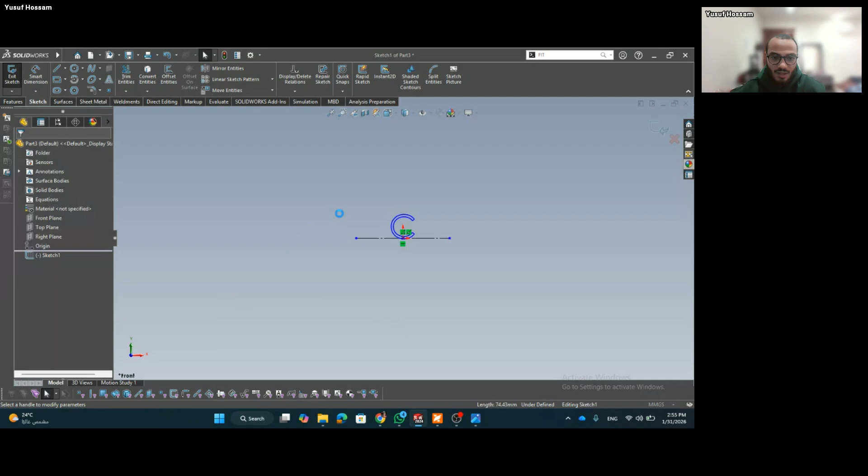So I'll just make a midpoint line. Make it a construction line. And I will text, C. Make it in the middle. And the font is 72. Very good. So this is the first one. I will extrude it by any value till now.

Now the second one we'll make on the right plane. I will just make it in any place, it doesn't matter. And this is E. It's in the middle and it's also 72. Very good. And I will extrude it again.

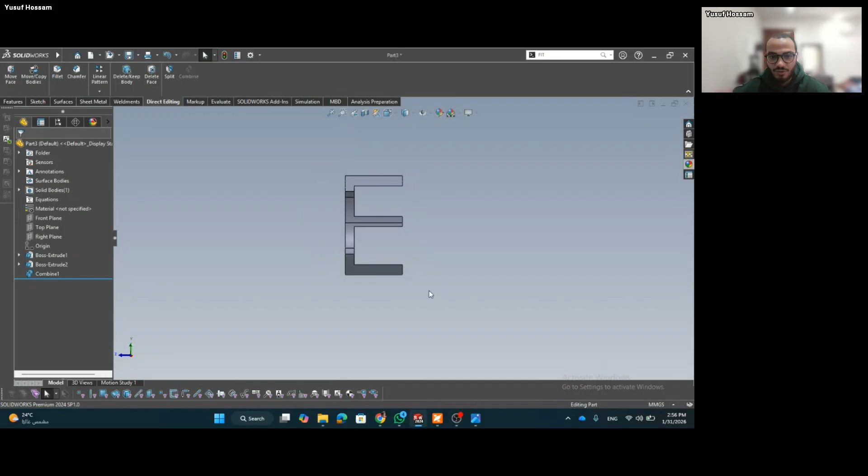So the trick here is combining these two bodies. There is an important thing we need to make, that these two bodies will not merge. So they are two separate bodies. So we can combine, common, this body and this body, and we will just get this shape: from a view it is a C, and from the second view it is an E. Okay. So this is the idea of this question.

And also, it's important to mention that the exam also has a BOM question, actually like 4 or 5 questions, but all of them are easy, not hard. The question of the BOM has an assembly that will be provided by the exam. And you need to know topics like configurations in the assembly and configurations in the part as well, and the bill of materials, the BOM in the drawings. It is one of the easiest questions actually, but it might be tricky to someone who doesn't know how to work with configurations in the assembly.

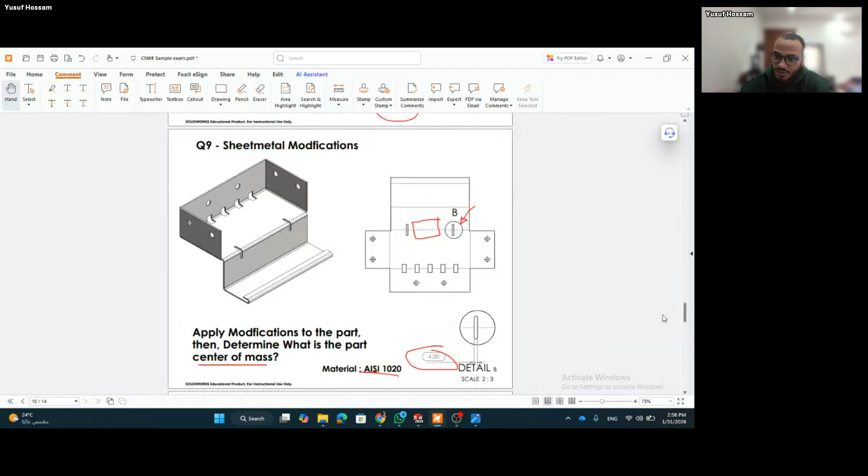So I believe that's it. This was the sample exam. If anyone wants to take the CSWE soon, this sample exam will be beneficial for him. All of the questions. You need to make sure that you understand the idea behind all of the questions so that you can make it correct and fast, because being fast is an important thing in this exam. Any questions?